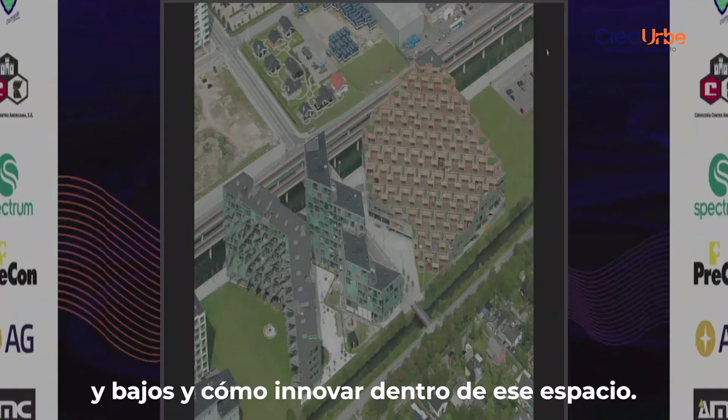We got our start in a really important component of cities, as the mayor pointed out, which is housing — particularly looking at the issue of middle and lower income housing and how to innovate within that space.

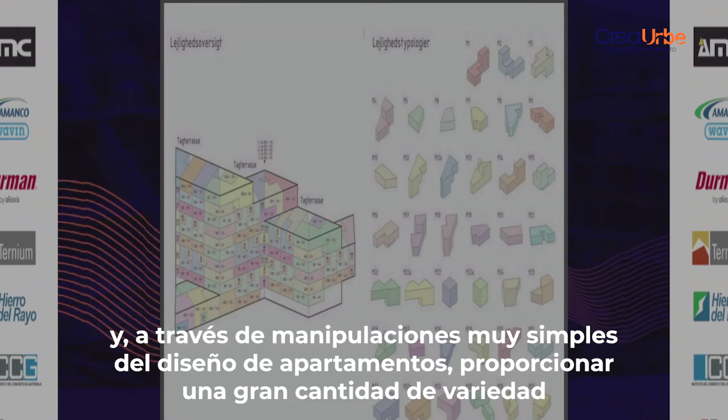Some of our first projects include the VM House, which looked at how to take a quite standard building and, through very simple manipulations of apartment layout, provide a great deal of variety for a great deal of living situations — whether a single person, a family of 5, or a new family of 2 or 3. It also used very standard components, but in a playful way to create variety, interest, and community. During COVID, community members here would hang out on their balconies and speak to one another vertically, diagonally, horizontally, etc.

Other projects looked at parking. In this one, rather than having a parking structure next to a tower, we took the parking and put it underneath the housing, which created a kind of cathedral for the cars, but also great views for all the residents above.

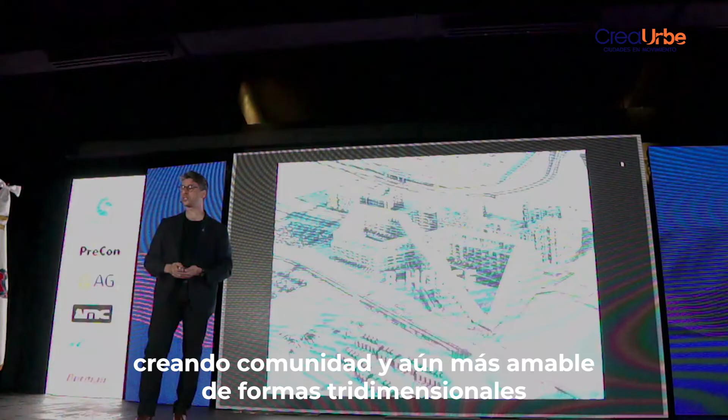Creating community in even more 3-dimensional ways here with the 8 House nearby in Copenhagen, where essentially we took a pedestrian street and brought it up and through this building as a 3-dimensional city — where townhomes exist, where kids can play, where you can meet your neighbor, and where there's a real sense of place in what might otherwise be a large and anonymous building.

More recently, we've been looking into even more modular methods. This is a system that we've developed and are now implementing in a few projects. It's a very modular and simple construction method. Underneath these, there's just a simple set of prefabricated concrete slabs acting both as structure and partition. Through very simple materials, we're able to create really great qualities. And this is low-income housing.

And here we were able to get a few extra feet of head height in the spaces between the modules, so really dignified spaces, and very popular ones. This is the line that was stretching down the block when these houses were put onto the list for residents. And then expanding that also into student housing.

This is a system that we've developed with a group called A Place To for student-oriented housing. These are placed at major infrastructure nodes, like this metro and subway station in Copenhagen. Again, through very simple prefabricated elements, a simple core, a simple set of elements that are repeated but varied in their repetition, you get a lot more variety and interest in something that actually has quite a good economic basis to it.

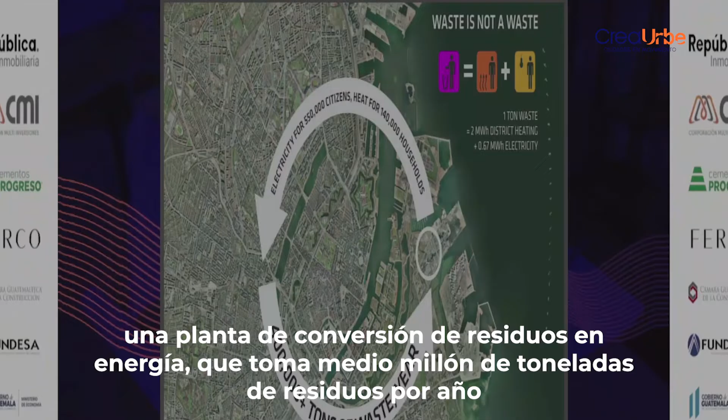In Copenhagen, we've recently been completing a waste-to-energy plant, which takes 500,000 tons of waste per year from Copenhagen and converts that into electricity for 550,000 citizens. It's a facility that at its inception was oriented around trash, around a lot of processing machinery, the kind of place that normally would be off and separate and distant and not have any relationship to the city itself.

But our proposal, which was eventually the winner and was adopted, was to take this and make it a more social place. Firstly, there are administrative and research spaces associated with it. But we realized it would actually be the tallest structure in Copenhagen once built. Copenhagen has a lot of snow in winter, but not a lot of hills. So we proposed and have realized a ski slope on top of this waste-to-energy plant, which accommodates a black, a blue, and a green slope.

We developed a surface with the same friction coefficient as snow that's synthetic, so you can ski year-round. And so today you have really a destination in a part of the city that otherwise would not be. So you have pro skiers and snowboarders here, all kinds of events. These are photos. It's real.

You essentially have a man-made hiking grounds now in the city at its edge. New views over the city, and really kind of an unexpected destination that comes from thinking about more than just engineering uses for our infrastructure. Lastly, we have the world's tallest climbing wall at 85 meters here.

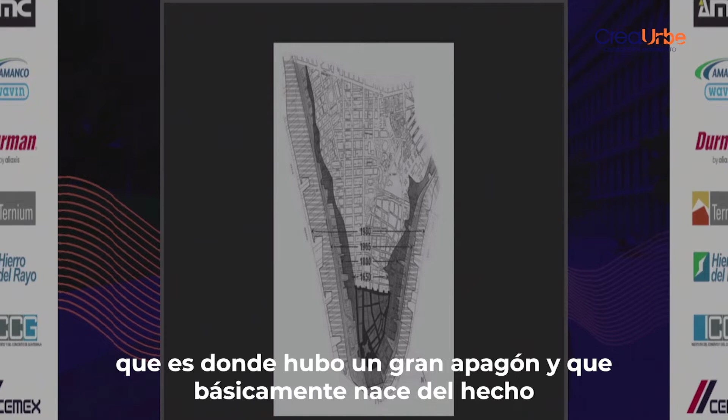The hurricane created a new neighborhood for New York, SoPo, south of power, which is where all the power went out famously, and which was basically born out of the fact that the Dutch and the British had been filling in the river for many centuries, and that all those areas of fill were very low.

So we knew that something would need to take place here. We knew that there would be some kind of a barrier that would need to be built, but we thought it would be a disaster of another kind if the wall that we then used to keep the water out also kept the city away from its newly rediscovered waterfront.

So we really looked at something like the High Line as a piece of infrastructure which was sort of retroactively made into a park, and really thought about how we could do that as a proactive measure, that we could integrate those kinds of social functions from day one.

So thinking about this geography, we thought about the scale of the neighborhoods that run through this. We thought about the scale of the flooding and that we have these natural pinch points. Taking a really big problem and then breaking it down into smaller components, we developed a series of compartments. Each of these can be built in one go, and you can sort of build the system up slowly over time. And so to do this, we also had a process.

The process was very much integrated with the communities. There are many NGOs running this waterfront, as well as many federal, state, city, and private stakeholders. And through a really exhaustive series of workshops over many months and inevitably many years, we developed a focus on the lowest income area of 130,000 residents.

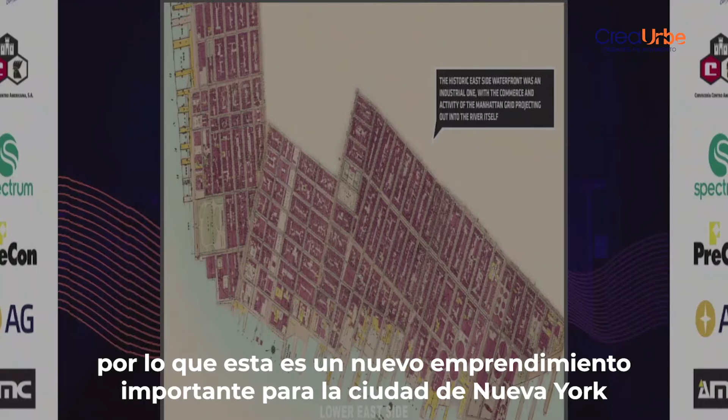On a waterfront that has a long history, one that was very much connected to its waterfront in the past, but that more recently has been cut off from its waterfront by the highway, and that faces real resiliency challenges along its length.

Is there a way to have the videos run, or no?

Basically the idea is to create a park that keeps the water out, that elevates itself out of the floodplain, but that accommodates a whole host of activities—raising the landscape, and accommodating both active and passive recreation, while really working with the communities to understand what those needs should be.

Here's the existing condition and the new elevated park with new bridges across the FDR highway. The park will then protect the neighborhood in case of a storm, with new connections, amphitheaters, new play areas, and new facilities such as bathrooms and comfort stations.

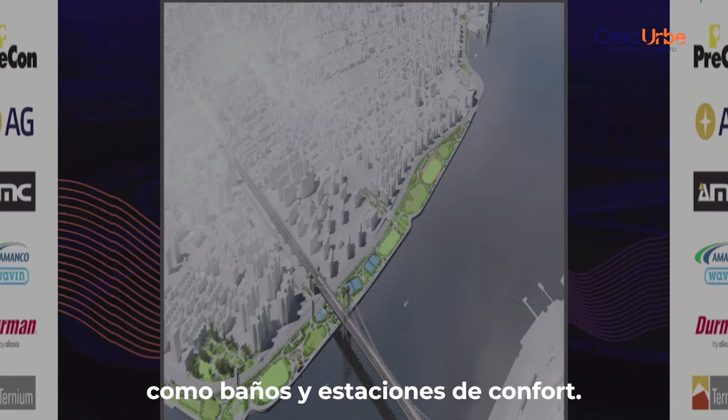This is under construction—a fully funded $1.5 billion capital project that we just started construction on last year. Our mayor, Mayor Adams, recently opened the first segment in the north, and we're really excited about this. We've also recently begun work on the western portion, Battery Park City, which will be a 3-year design process.

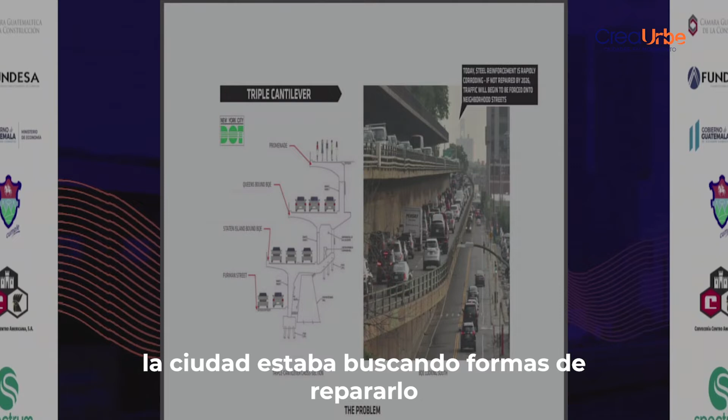Thinking about infrastructure, we've also been looking at mobility infrastructure and highways in New York City. The BQE famously has this triple cantilever segment, which is in great disrepair. The city was looking at ways to repair it, and many proposals were really only thinking about the roadway and infrastructure, without layering any other benefits on top.

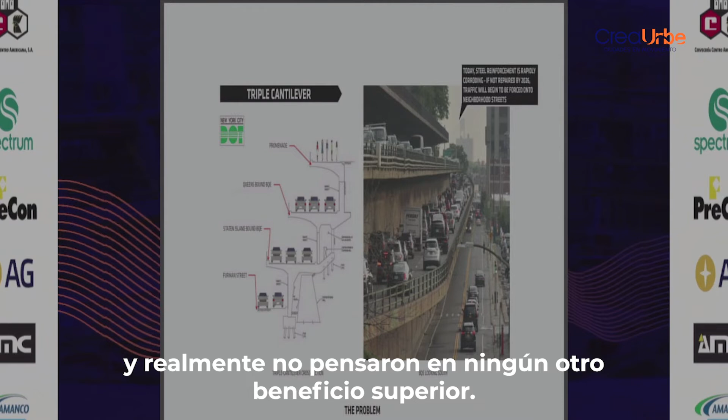So Mayor Adams, when he was the borough president, as well as the community, worked with us and came to us asking if we could help them develop a new plan.

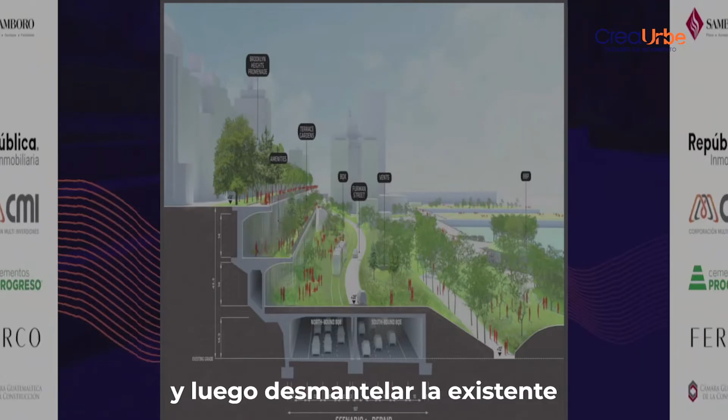Working with all of these groups, we looked at the area and discovered that if you could work across multiple jurisdictions—working from the highway but also within the park—you could create essentially a new roadway below the existing roadway, create more park on top of that highway, then decommission the existing highway and convert that into yet more parkland.

A huge transformation for this area, with new connections from the waterfront down. Our office is just around the corner here.

We're very pleased that after 3 years of community engagement and work, the city has adopted a new approach, and we'll be working with the city over the next several years to reimagine this central stretch from Cobble Hill up to Dumbo. The city will then be looking at a much broader vision for the corridor as a whole.

Thinking about mobility, the Brooklyn Bridge is really something emblematic of our mobility infrastructure. This is an early view taken by Thomas Edison running along the trainway. Today you have extreme overcrowding on this bridge.

City Council, during COVID, asked for ideas about how we could help make it so that when the bridge reopened after COVID, we could accommodate a different set of demands on the bridge. It's also a place where, during a lot of our protests and events, people came and just took the bridge over, taking the streets back.

If you look at the history of the bridge, what you find is that originally, when it was first built, it was primarily trains—heavy rail, light rail, a tolled road meaning you had to pay for the use of horse-drawn carriages, and then in the central area, a space for people and bikes.

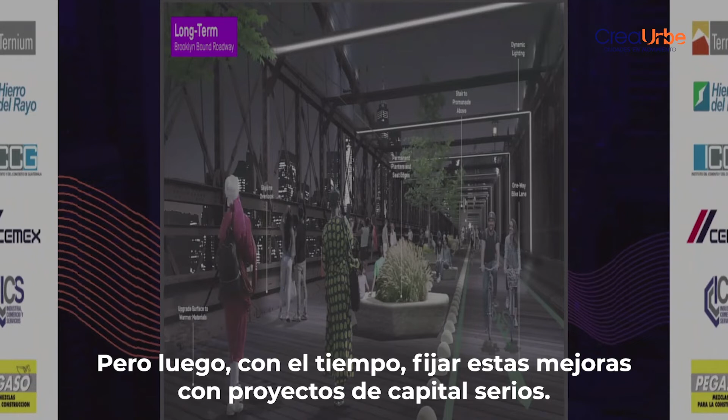So from a condition like this to one of more efficient and effective mass transit - these pictures were taken during some of the protests - basically locking these changes in, creating very light touch interventions on weekends, for example with food trucks and movable furniture, but then over time locking these improvements in with serious capital projects, and thinking about a range of activities over the course of the year.

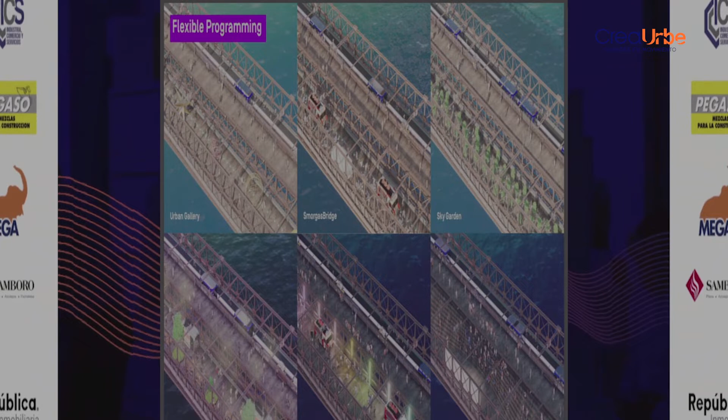The other thing is that there is so much car infrastructure serving this bridge that really chokes the adjacent areas, that we would gain another 35 acres of open space by taking cars off of this bridge.

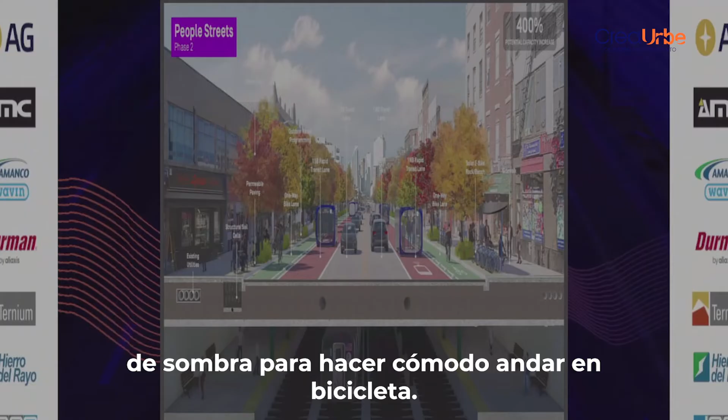So we took this idea and started to expand it beyond the bridge itself, thinking about a network of people streets that could act as a set of arteries for the city, taking car-centric streets like this one and, over time, adding shade to make for comfortable biking and eventually mass transit, to really start to capture some of the benefits of these kinds of places.

The benefits of increased pedestrian movement and biking on local economies, on public health, both physical and mental, on rainwater and environmental filtration. We're really pleased that the city adopted this suggestion and recently opened the first lane on the northbound side, and we're looking forward to more.

So those are some of our experimentations with this kind of work in the New York City context. Recently, over COVID, I had the opportunity to live in and work with the state of Penang in Malaysia on an extension of their city, roughly 500,000 people on a series of 3 islands below the island of Penang - very much a developing context.

What was great about this is it really gave us the opportunity to take so many of the ideas we've been developing and see how they might land together in one new development. So after the competition win, we worked intensively with the public-private partnership on this for a year, really developing the technical and economic feasibility.

We came up with a framework that I'll take you through some elements of, because I think there's things to learn here, both in the creation of new cities and in their implementation for existing cities. Firstly, compact neighborhoods of the type that the mayor and others have been discussing - we really thought about 15-minute neighborhoods where living, working, and play might all be had within a quick bike or walk of your apartment.

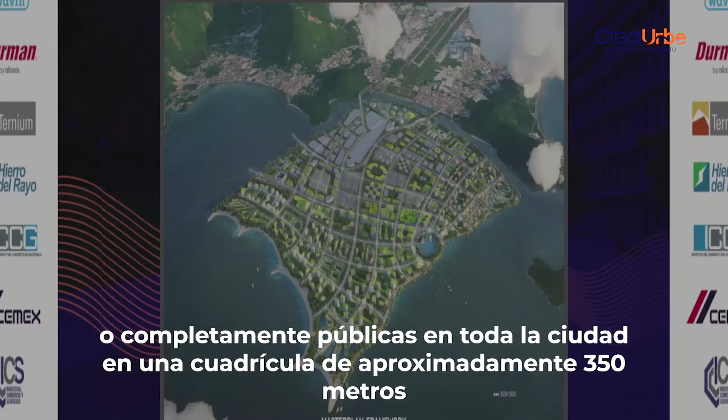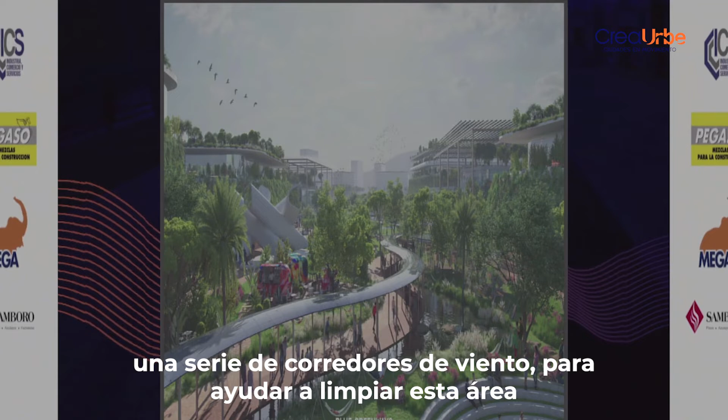Important to that, in a context where gated development is really the predominant typology, we were really clear that we wanted to create a series of continuous routes that were completely public throughout the city on a roughly 350-meter grid. And then we aligned that grid to prevailing winds to create a series of wind corridors to help flush this area, which is on the equator, out as urban heat increases.

We developed a series of green-blue canalways that sit below the grade of the existing city. As I've driven around Guatemala City and seen the barrancos, I've really thought of this, because the whole idea here was that by using these canals as major bike arteries, you would be able to get from anywhere in the city to anywhere else without crossing a single road. That's a major factor in safety, in people adopting biking, and eventually being able to do it quickly, particularly with electric biking. So I think there's a big opportunity for that in Guatemala City.

And it's something that we explored in Penang. Importantly then were our streets and streetscapes - so this isn't just a pretty picture. This is a highly measured, contested, and eventually agreed upon cross-section involving utilities underneath, bioswales running through, buffering from the roadway to the bikeway and the pedestrian way, making sure we have covered walkways, eyes on the street, making sure buildings are up against the street so that streets feel safe.

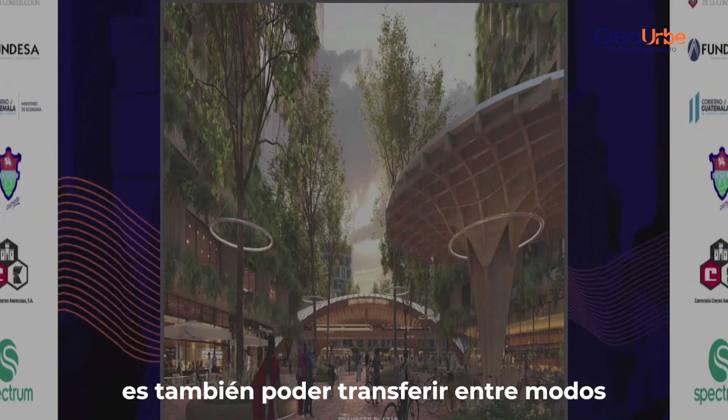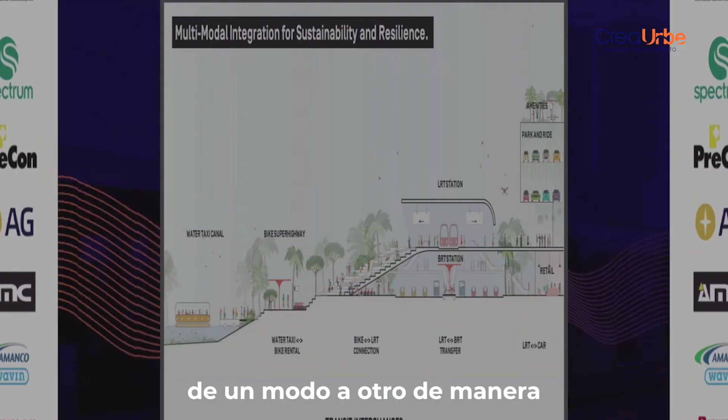Importantly, this is also about being able to transfer between modes—having biking, public transit, buses, but with nodes where you can efficiently transfer from one mode to another, so the transfer isn't so onerous that it makes you just stay in your car from home to your destination. With those elements, particularly the transportation piece, we were able to get to a 70% public and personal transit mix, which got us down to a 40% reduction in carbon emissions from a baseline development, and a place with different qualities than a lot of developments you see in Malaysia today.

This is currently under implementation.

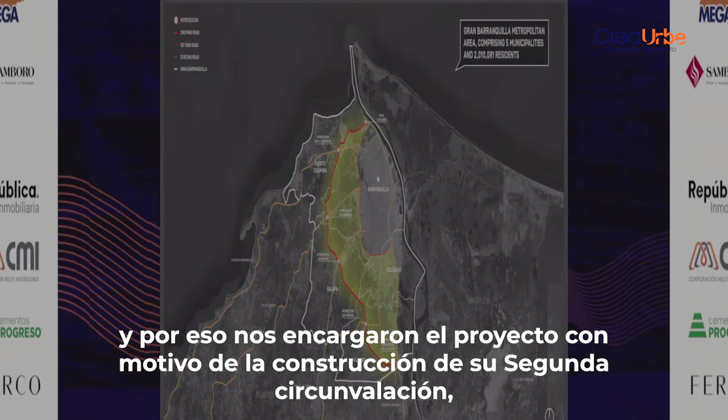Now I'm going to come to a context much closer to home, Barranquilla, in Colombia, where we've been working with both the state and the city to take many of these ideas and have them land in an existing context. For those who haven't been to Barranquilla, it occupies a really interesting position in the country—it's both part of South America, but it considers itself part of the Caribbean. They call themselves the Puerta de Oro, the Golden Gate. They sit at the edge of the Caribbean Sea and the Rio Magdalena, their major river, much like New York City, where the Hudson intersects with the Atlantic. Today it's the fourth largest city in Colombia, but it's growing. We were commissioned on the occasion of their Segunda Circunvalar being built, and questions about what would happen around that infrastructure.

For a little bit of history, Barranquilla has been a city of firsts. It had Colombia's principal port for many decades, the first airport in the Americas. It was Colombia's second largest city, so it really benefited from its external orientation, and had a diverse set of immigrants and residents because of that—one of whom, famously, is Shakira. You'll hear her give shout-outs to Barranquilla often.

During the later 20th century, the city really started to turn inward as the security situation in the country worsened, and the economic policy of the country turned inward too. Barranquilla really suffered from that. But from the 90s onward, it has started to globalize and grow. It's now a booming place.

It's interesting to look at how that growth has actually happened spatially. These are the three original settlements, pre-Hispanic, in the area. This is the colonial settlement here in 1821. The next 100 years led to a relatively compact city, and you can see even in the next 50 years, through that whole second half of the 20th century, very compact development. That's because, as we were working on this project with the NYU Marron Institute, they spoke about the invisible wall—with the security situation in the country, the city stayed compact, and people were, even through the 90s, loath to move too far out of the city.

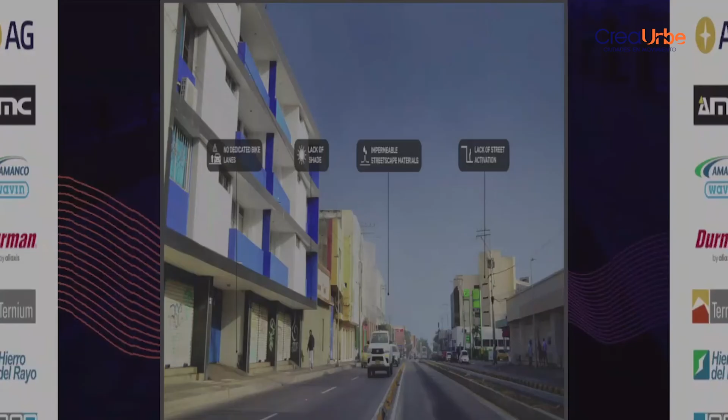7 projects for Barranquilla 2100. The first we called Electricidad, which is really about a street network that is powered by electricity, both for public transit, but also increasingly for electric bikes and scooters. So this is the very simple idea of taking legacy roadways, creating shade, providing charging stations for those forms of mobility, and being able to power that network.

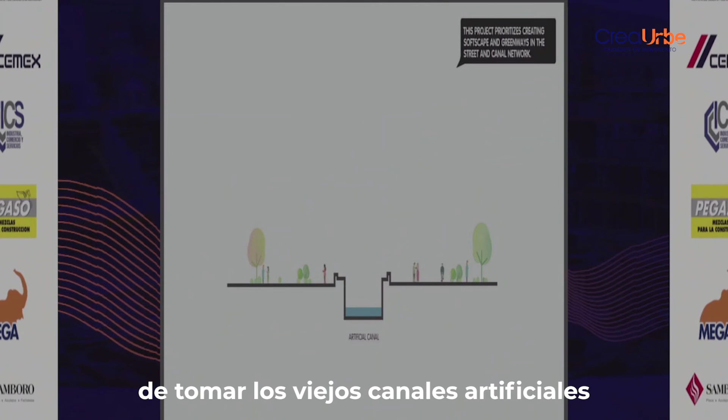Ciudad, which is about this idea of taking the old artificial canals and then naturalizing them, widening them, turning them into multi-purpose infrastructure. So in places like Barrio La Paz, which has a new park that's been built along this edge, really starting to expand that, create more space actually for stormwater capture, and then more value for the residents around, and new spaces to hang out. These areas would flood during large rain events, but then during non-rain events, they'd be open for use.

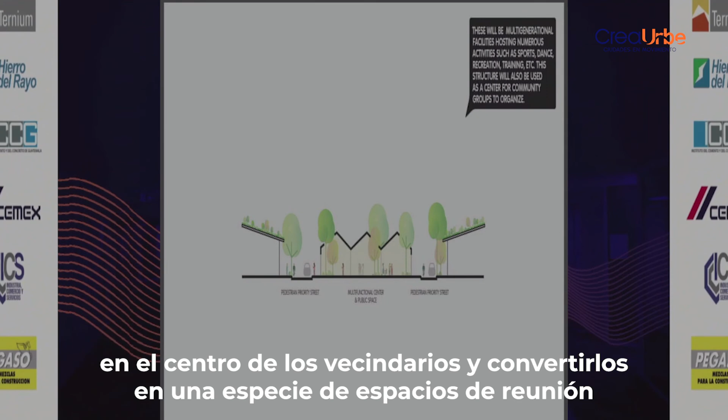This was one of our favorites, the urban living rooms, which is the idea of taking existing industrial buildings and underused parcels in the center of neighborhoods and turning them into sort of gathering spaces that would be developed by the city. Places for shade, for markets, for dance and community events.

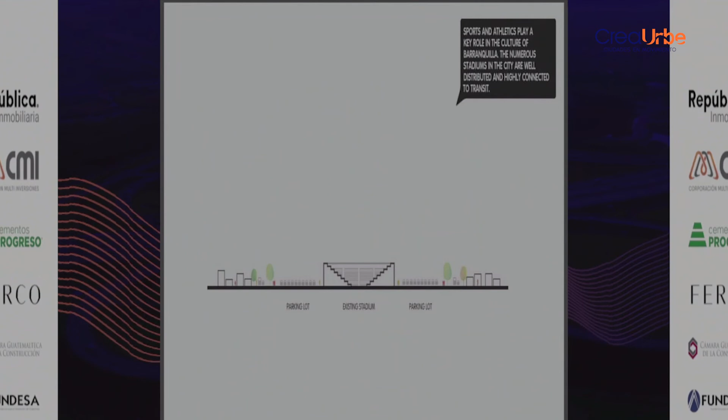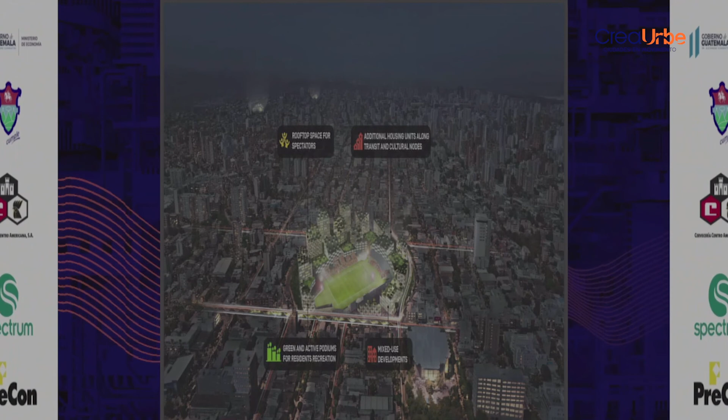Taking advantage of major infrastructure within the city itself. The city has a lot of stadiums, which have pretty good transit around them, but then using their underutilized spaces for parking and otherwise to create dense transit-oriented development, connected with light rail.

In places with a lot of risk, again, the barrancos are called to mind here. Barranquilla is actually called Barranquilla for its barrancos, which run along the hillside. There's a lot of informal development in these areas and a lot of landslide risk. And nobody has really been able to figure out what to do with these areas.

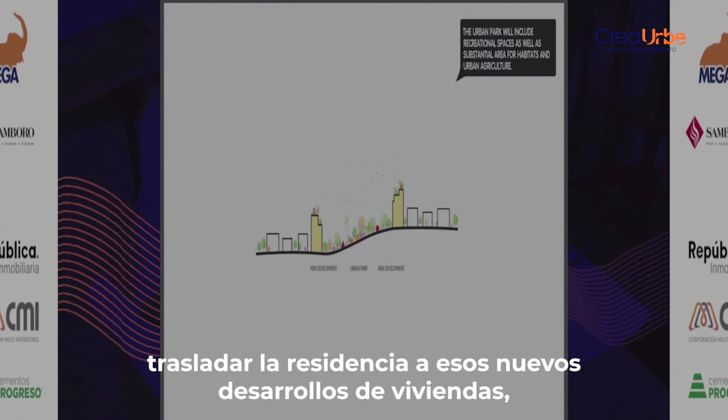So what we've proposed here is to start to formalize the development by creating dense housing along the edges of these areas, moving residents into those new housing developments, and then turning those former risk areas into new parkland along this, what's called La Ladera, this sort of lifeline running through the city that sits on a hill.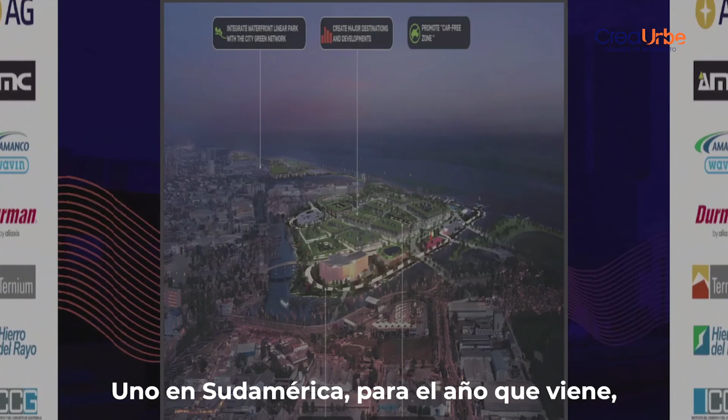And then finally, or next to finally, activating that industrial waterfront with a series of new neighborhoods that would each have a different focus. In this case, Barranquilla recently secured the Formula One for South America for this coming year. And so they're working very hard now on a Formula One track that will be built on this island with a park around it, which will then also set the framework for future development. This is currently under development today.

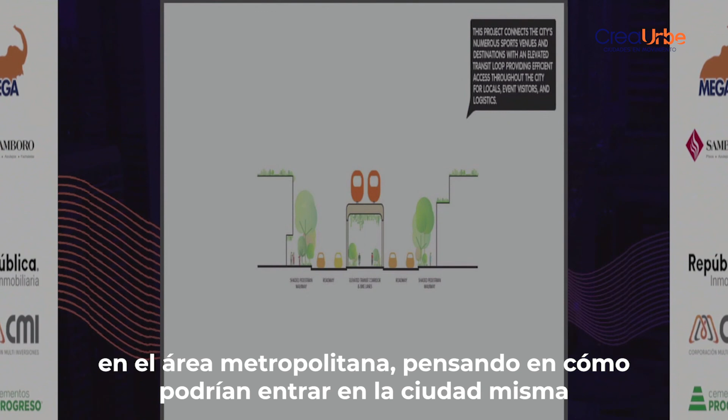And then sort of echoing El Hilo in the metropolitan area, thinking about how that could come into the city itself and really start to connect on a more efficient loop system those different areas of the city.

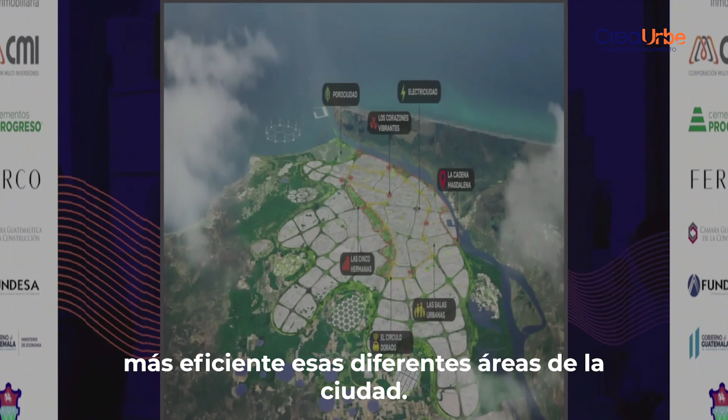So 7 projects for the metropolitan area, looking at implementation over time and how that would happen.

And I've just had this little puzzle piece show up, which is maybe telling me that that's a good place to end.

I would love to go to my last slide, if I could. But if I can't, I'll just close with these remarks.

I think it's easy to look at places like Amsterdam and Copenhagen and think, oh, they've been like that forever. 50 years ago, if you look at images of Amsterdam and Copenhagen, which I was going to show here, they look almost exactly the same as some of the most congested routes in places like Guatemala City or Los Angeles or what have you. And it's been through concerted policy, changes to infrastructure, that new way of living has been accomplished.

And so I think you all are really in a great position here, having the will and having the knowledge to know that these are the things that you need to be looking at as a city. And we're very excited to be here and hope to work with you further on these really important ideas for the city. Thank you.